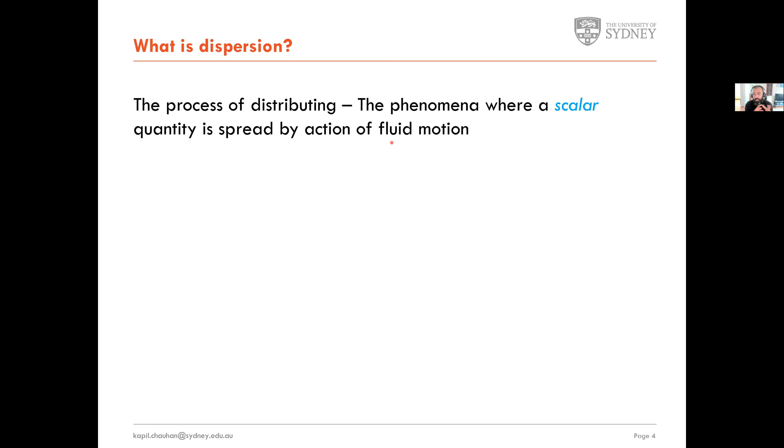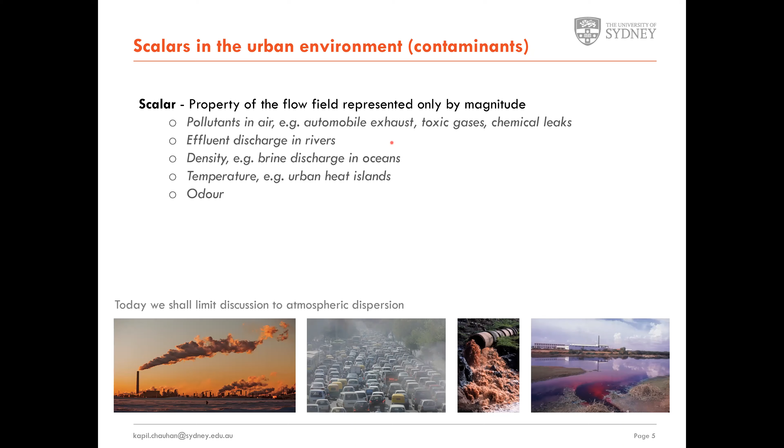Scalars in the urban environment can be categorized in different groups. These could be pollutants in air, which usually come from factories and automobile exhaust. They can be toxic. They can be accidental chemical leaks. There could be scalars or contaminants dispersed in water, in rivers or brine discharge in the ocean. Scalar is also temperature, so you can have temperature mixing with the environment because of urban heat islands. And then there is also odor, which is smell.

Scalars can be passive. When they are passive, they follow the flow and they cannot influence the flow field. So in this example here, what you see is that some smoke is released from these tubes and it just follows the flow and it gives you an instantaneous idea of where the flow is going.

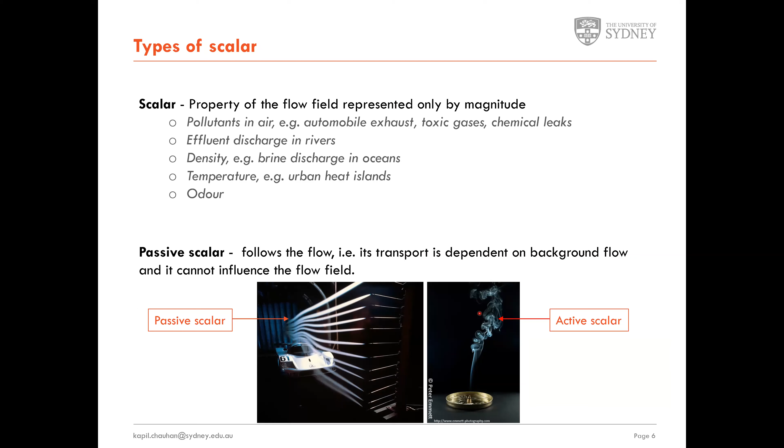And it can be active. So this is something that you would see in a volcanic eruption, where the smoke is hot and it will rise up by itself. So there is no external forcing needed for it to go along its path.

An important aspect of scalar dispersion is also the geometry of release. So there is a point source, where the location from which the scalar is emerging is quite small or point-like compared to the domain in which it is dispersing. Okay. It can be a line source. So think of a traffic jam and all these cars are exhausting some toxic chemicals, and then it's coming out looking like a line source.

And then there are area sources. So bushfires, or smoke coming from bushfires, are a large area source. Open landfills, they release odor and they are also an area source.

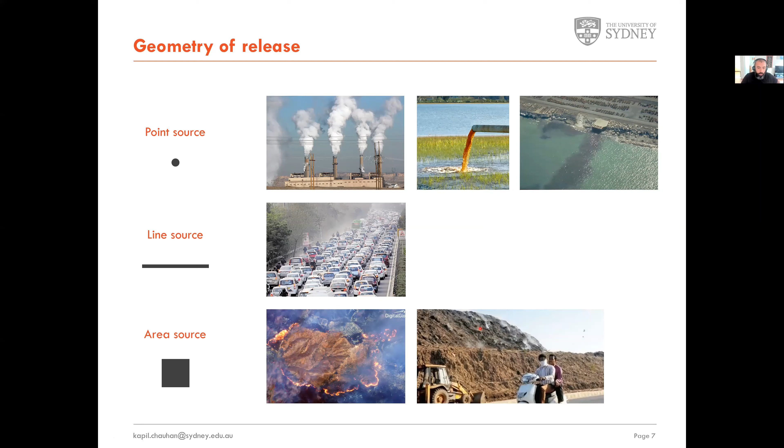Other complexities could be when these scalars or these contaminants are chemically reactive. When that happens, they induce a highly non-uniform source. Okay, so it's like a volume source and it's not uniform. So sometimes you have a very strong chemical reaction happening in some part of the plume or the flow, whereas in other parts it might not be that strong. You also need a priori knowledge of the chemical composition, which is changing all the time. And there is a significant variation in density.

You can have particulate matter, which is quite commonly known as soot, or you can think of the terms PM 2.5 or PM 10, where PM 2.5 is matter 2.5 microns in diameter or smaller, and PM 10 is 10 microns in diameter or smaller. And because they are solid particles, they have higher density than surrounding air, and they don't strictly follow the flow because they have a settling velocity.

And it depends on how strong the forcing wind is. If the wind is strong, then they almost follow the flow, but otherwise they will deposit somewhere else.

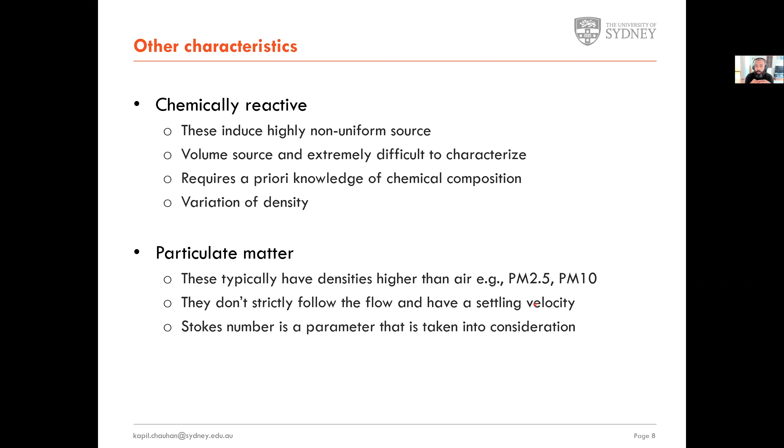Why are we studying dispersion? It's an important problem. We know that because everything that we know about air pollution is not good. There are some interesting numbers to look at. I didn't think of this when I started this research, but more people on our planet live in urban areas than in rural areas. And as of 2021, there are 35 megacities, which means that there are more than 10 million people in each of those.

So a substantial population of our planet is living in congested, crowded environments. And in all these environments, all the activities that we do, like taking transportation and infrastructure, require energy, and we have emissions coming from those activities. These emissions usually lead to air pollution, and they cause a lot of health problems such as asthma, cardiovascular disease, and so on.

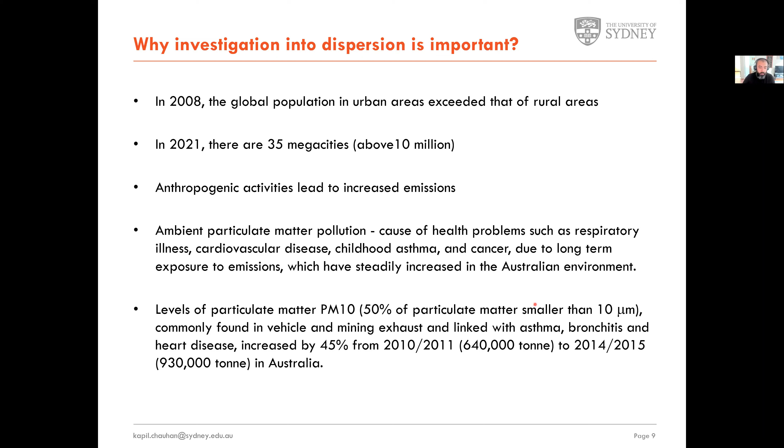Particularly, particulate matter is significantly harmful, which is why there is a significant push to get rid of diesel exhaust and cars which have conventional combustion chambers, which is why electric cars are preferred now. But unless we generate that electricity using a clean source, we are not solving the problem, we are just pushing it somewhere else. Again, there is a health issue associated with air pollution.

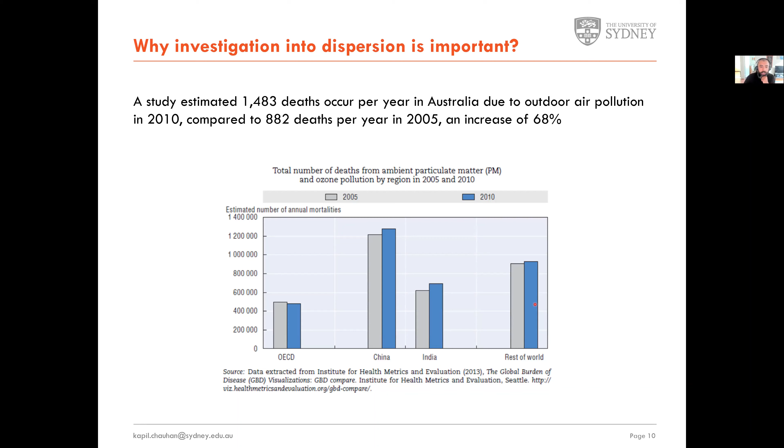So these are the numbers from a study that was done in 2013. I don't have the latest numbers, but the significance is evident here, where the number of deaths occurring due to air pollution itself is more than anything that we have seen. I think these numbers are even worse than COVID. And there is a significant jump in 5 years. So you can imagine that if we keep increasing the urban density, these issues will become more and more severe.

So what do we want from studying urban dispersion? The expectation is that we cannot get rid of emissions, at least not until 2050 when we want to go to net zero. So emissions are part of life. And they could be sustained release from known sources.

So how do we predict what's going to happen to the regions around it and where the smoke is going? There could be also accidental release, and this is temporary. This could happen over a period of hours or a few days or weeks in terms of bushfire, and then we want to predict where is this going and what would be the impact in the surroundings.

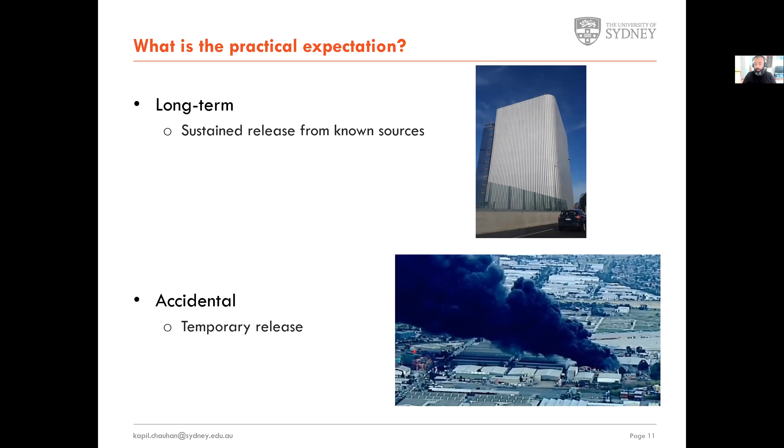Which locations in space are more likely to be at risk? So again, going back to this, if this plume is always going up, then only the regions around it will be affected. But due to the atmospheric turbulence, it is very likely that the smoke is going to come down again, and we'll talk about that a bit later. And then it can create issues for people who are not in the vicinity of the source, but many kilometers away. And this probability of exceedance we need to know for emergency response. So what action needs to be taken?

Exposure time is something that is used for urban planning and policy. So for long-term exposure, if you have, let's say, a sewage treatment plant, and there is some odor coming out of it, and it's going to be there for many, many years, then the development will prefer that there are no residential areas around there, because their quality of life will be affected by that. So you want to predict what would be the impact of a sewage treatment plant in the surrounding neighborhood.

You want to predict what would be the impact of a chimney exhaust out of M4 to the surrounding neighborhood, how long it will be, or how tall it would be. And these things can be understood by looking at exposure times. And this could be intermittent, but they can be modeled.

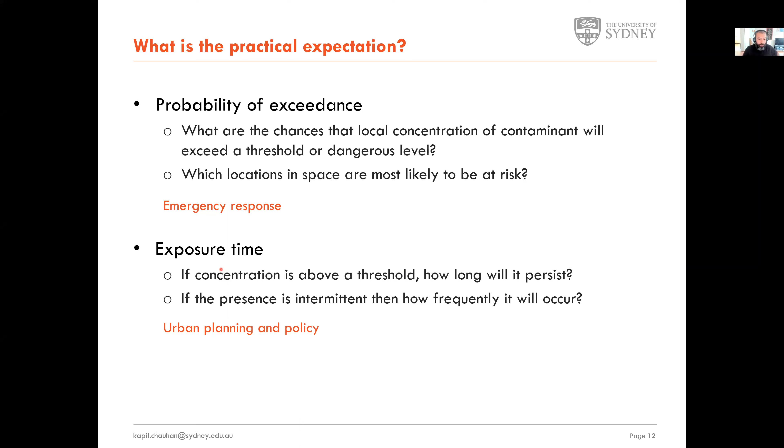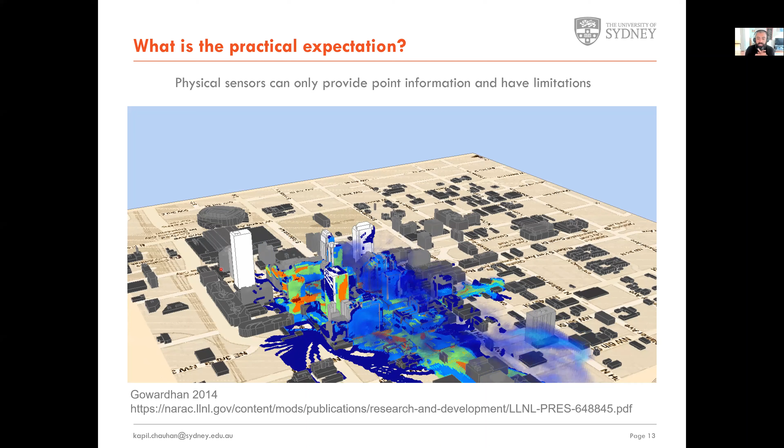So ideally, we would like to have the capability of predicting urban dispersion in a scenario like this, because physical sensors are limited. I cannot have a physical sensor placed at every corner of Sydney CBD. There would be just too many and too much data to keep track of. So what we would like to do is simulation. This is a simulation of an accidental release where something has given up here and then it is moving due to action of wind and it's spreading in the CBD area.

To do this, we want to do simulations using the governing equations. There are two governing equations that we need to keep track of, the flow itself and the concentration. Fluid flow is governed by a set of nonlinear partial differential equations known as the Navier-Stokes equations. I don't have this slide to scare you. I just have this slide for you to appreciate that things get complex very easily. This I show in my course too, and I don't expect students to remember this equation, but they are there. You can't get rid of them.

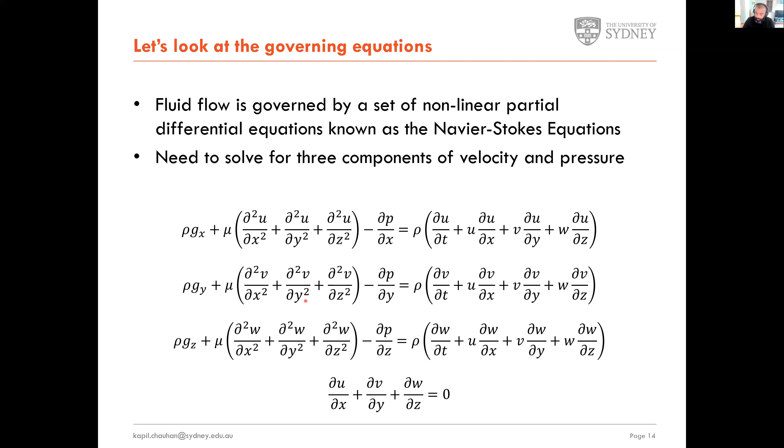So we know that dispersion happens by fluid flow. If you want to know the fluid flow, we need to solve these equations, the three components of velocity and pressure. Easier said than done, because Navier-Stokes equations don't have a solution. There is an institute called Clay Mathematics Institute that has outlined 7 problems, and if you solve one of those, such as the Navier-Stokes equations, you get a $1 million prize. Navier-Stokes equations are still not solved, which is a big problem.

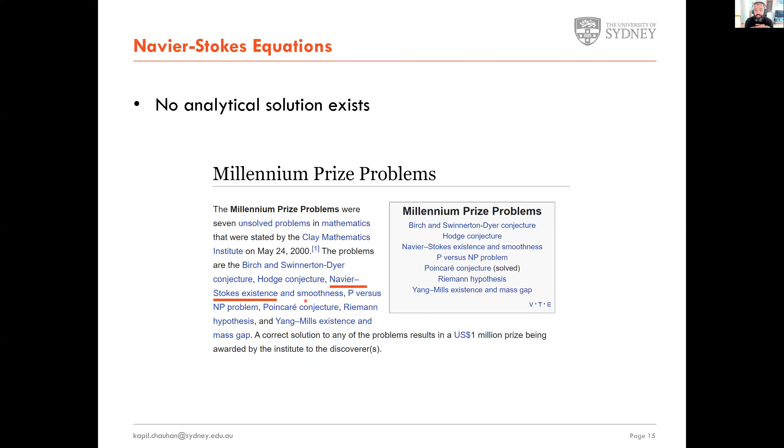These were formulated in, I think, the early 19th century, and it's more than 150 years, and we still don't have an analytical expression for these. So we have a phenomenon which is governed by a flow which has equations that cannot be solved. On top of that, we have the scalar dispersion equation, where there is a source term, a diffusion term, and an advection term, and this is the time variation, which is often ignored for steady state. But advection is the term governing how a scalar quantity phi will move in the flow, and this requires knowledge of velocity.

If we don't have knowledge of velocity, if we can't solve the Navier-Stokes equation, we can't solve the dispersion equation. So we are limited by those factors. Ideally, we would like a solution which says what is the concentration at a given location, given wind speeds, a given pressure, temperature, and time. But that is not always possible.

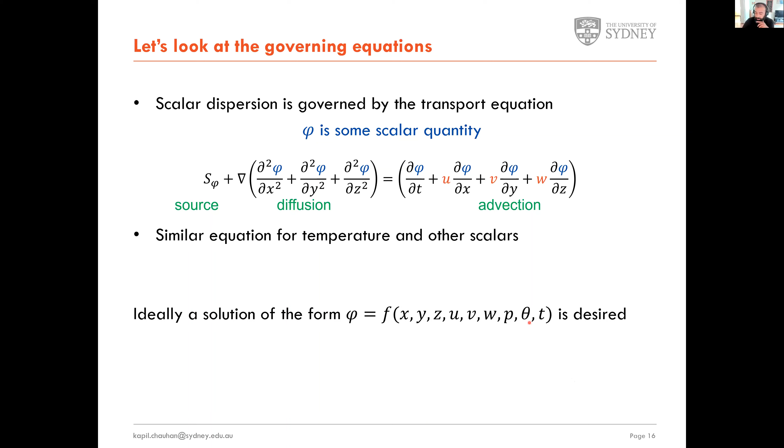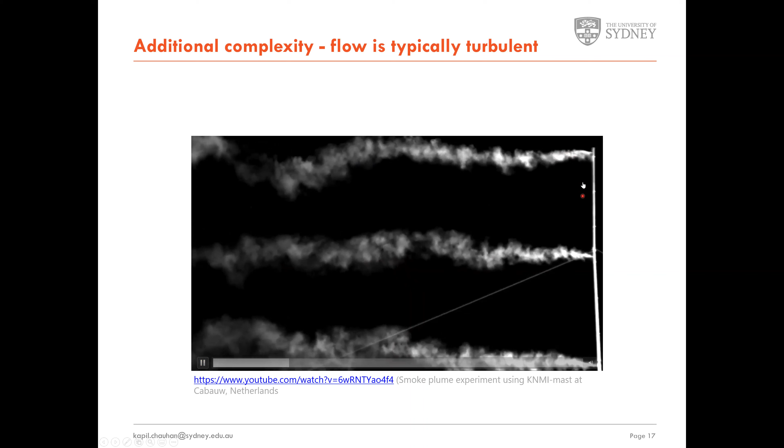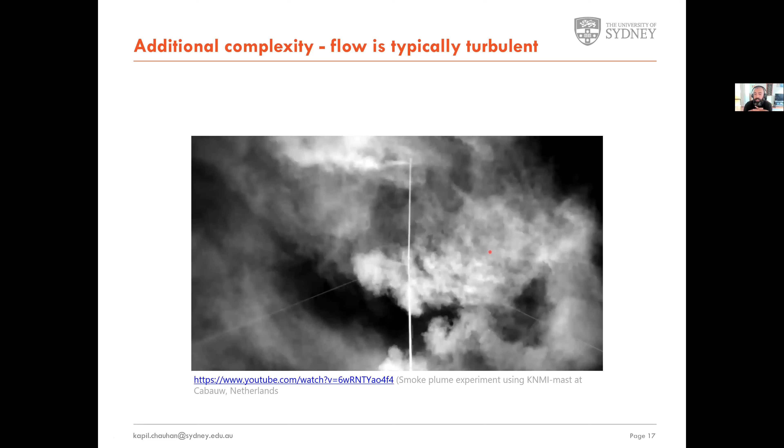These equations we cannot solve, and there is an additional complexity where flow is also turbulent. Here is an example of flow visualization where some smoke is released in the atmosphere. These are field experiments, and you can see that it's not moving smoothly. There is some fluctuating behavior, and this fluctuating behavior keeps changing. It's not that it is just moving randomly. It keeps changing direction. It's very erratic. This is a turbulent flow. Turbulent flow on top of a Navier-Stokes equation that cannot be solved creates more complexity.

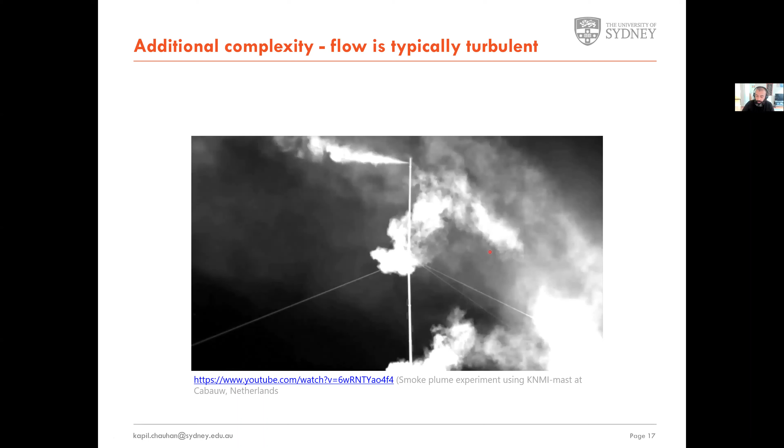So we are left with solving these equations by numerical methods. Something like Newton-Raphson or RK4, we can use and do a numerical simulation. Numerical simulations are challenging because the flow is turbulent, and it requires us to resolve things at many different scales. If you look at the plume here, at the source it has some diameter which could be a few hundred meters. Once it goes up in the atmosphere, its diameter could be of the order of kilometers. And then it has these big bulges, then it has small scale features.

To resolve this, we need a fine mesh to do the computations. If I take a grid which is only this big, I can only know features which are this big. I cannot know the details residing in this box. If I take a smaller grid, the details I get are bounded by the size of the box. If I want the finest features, I have to make my meshing even smaller. This is similar to having more pixels in an image: a high resolution photograph shows more details. Same goes with numerical simulations of fluid flow. More points in your domain give better details of the flow, but that comes with the cost of computation.

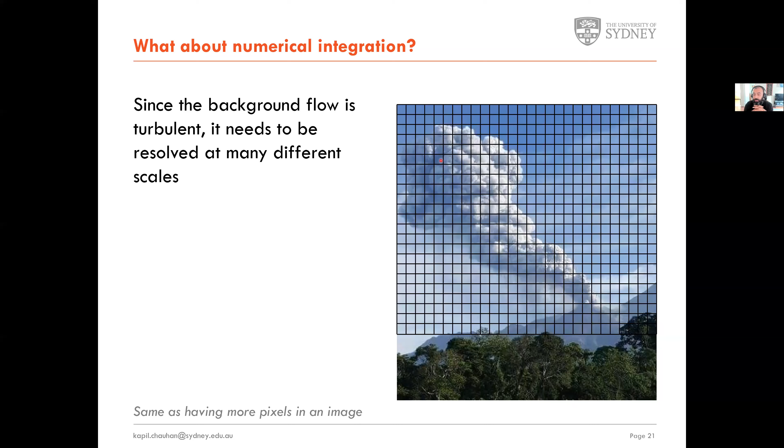So in this example, let's think of a box starting from the source, going all the way up to the Sydney CBD, about 100 kilometers long. We will take the box to be 20 kilometers wide, and in the vertical direction 1 kilometer. Sorry, this should be 1 kilometer, not 1 meter. So we are hoping to simulate something which is 100 kilometers by 20 kilometers by 1 kilometer, and the desired resolution is 10 meters. At every 10 meters we would have 1 point, resulting in 10,000 by 2,000 by 100 grid points. We have to represent these points for velocities, pressure, their derivatives. So the memory requirement just to represent the primary variables at one time step is 600 GB. This is an estimate.

If we are going to do an unsteady simulation where we want to predict dispersion at many time steps, then the memory requirement is even higher. And calculations on these large matrices and taking derivatives is quite slow. So we have to be smart about the simulations. In practice, what we do is something called a Reynolds decomposition. The equations are not of importance here.

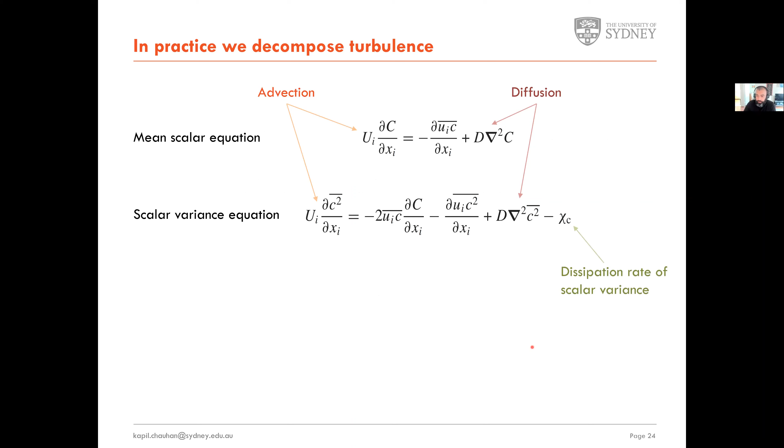And when we do that, our equation for the scalar, now using C as concentration, will have the advection term, but now for the mean quantity itself. And there is no time dependent term here. Then it would have diffusion, which is based on the flow properties. Diffusion of a scalar depends on the scalar itself. And then we have these terms which are due to turbulent transport. These are the terms responsible for mixing the scalar in a random and erratic manner.

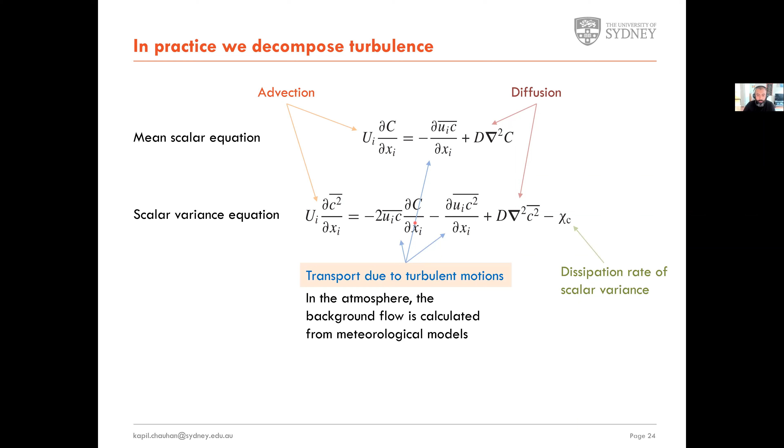And these terms are something that we approximate. So we don't calculate them, but we use empirical relations or functional forms to approximate them. These are not known beforehand, so we have to estimate them based on measurements or some kind of theoretical arguments. But because they are approximations, they also induce some error.

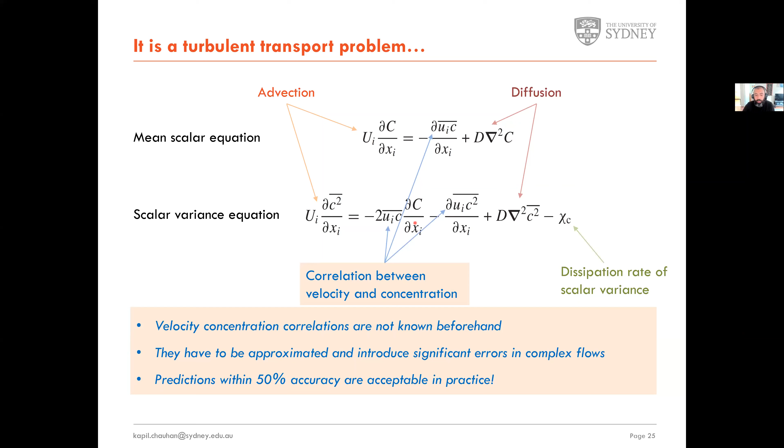And in practice, if we get our concentration prediction within 50% right, we are doing a good job. That's being changed because we have faster computers and people are doing very large scale simulations. But even now, for regulatory models, anything under 50% is acceptable.

So one of the ways to simplify this equation, where we can calculate this left-hand side, we can calculate the diffusion term, but we cannot calculate this, is to replace this flux term by a gradient diffusion model by estimating an eddy diffusivity. And when we do that, we can then solve this equation and we can get an analytical expression for the concentration.

And the analytical expression for concentration gives you a profile of the concentration in XYZ such that in X, it is moving with the wind direction, and in Y and Z, it is spreading according to a Gaussian profile. So this is called a Gaussian plume. The trick here is to prescribe these half widths. So it will spread in the Y direction or the lateral direction. It will spread in the vertical direction.

And we have to prescribe those growth rates based on experience, experimental evidence, and that will change depending on the local conditions. When we do that, we can very well estimate what the concentration would be. There are empirical models which will also give the probabilities.

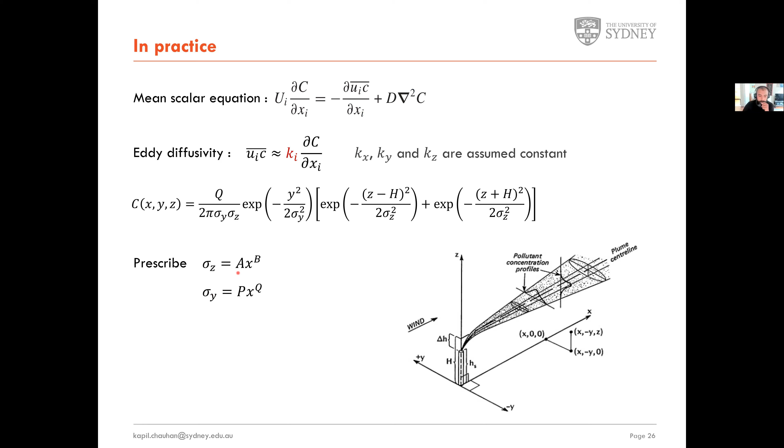There are many local models available worldwide. Now these are local models because these quantities that we prescribe will change depending on where you are. So if you prescribe this in a flat area, it won't be the same in semi-residential areas. So different authorities or different local regions will say, use this model because it works better for our cases.

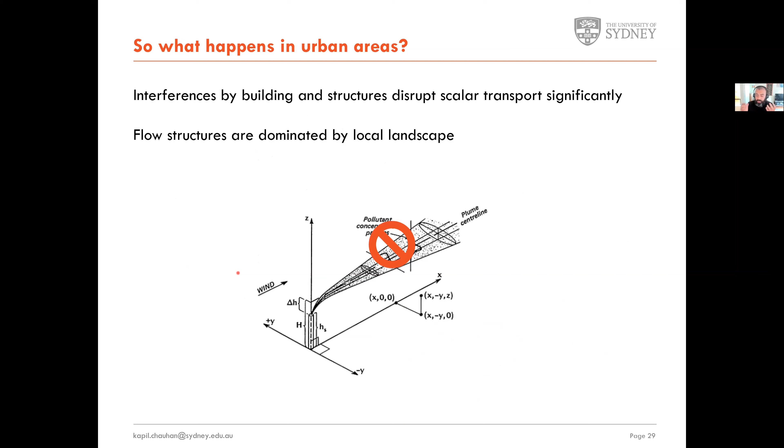Urban flow is characterized by a canopy layer where the flow is dominated by the presence of buildings and trees and other landscape structures. And in this region, you will get a lot of backflow and recirculation, a lot of regions where there would be stagnation of flow and the concentration can get trapped.

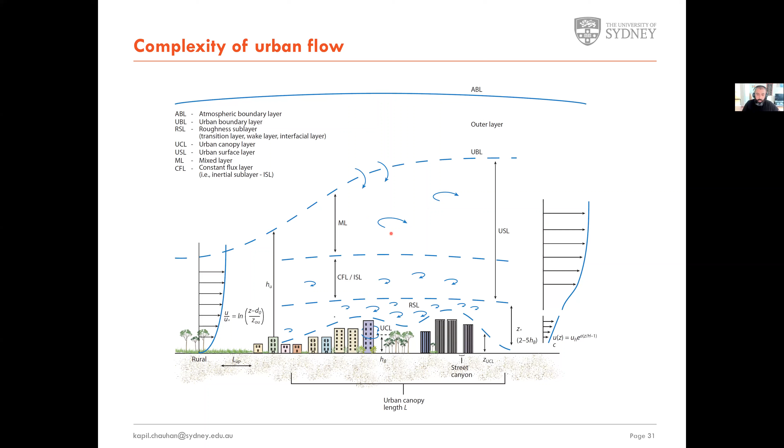Urban flows are complex, not just because of the presence of the urban environment, but also because of the surface. Because in the urban environment, you will get some distribution of velocity going from very high at the top and low at the bottom. But in an area like Sydney or Melbourne, which are coastal areas, you will have flow which will suddenly change from a very dense roughness area to a smooth or relatively smooth region over an ocean.

And in that case, the profile or the change of the velocity from the bottom to the top changes quite significantly. So the incoming flow will also change. So if you have a plume emerging from this region, it will spread differently under this profile compared to a plume emerging from this region, and it will spread differently in this profile.

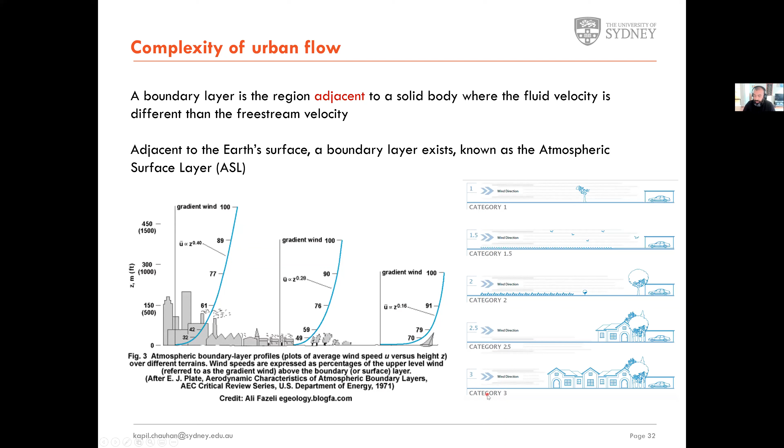So when you have mixed surface characteristics, that will also lead to complex considerations. So in Australia, we have terrain categories to categorize this. Usually anything in the urban region would be in terrain category 3, which means that there will be a strong presence of turbulence in the flow.

At the same time, in the urban region, you also have effects coming from stability. So stability is something where you have a daily cycle of day and night, where the surface gets heated during the day and it cools during the night. So the temperature of the atmosphere going from the bottom to top will be different depending on the time of the day.

So when you have an unstable layer, the surface at the bottom is quite warm, whereas the temperature decreases and it goes cooler and cooler further in the atmosphere. This is called an unstable layer because temperature at the bottom is higher, so the density is lower, and because of buoyancy, the flow will automatically want to go up. So it's naturally unstable. And in those cases, if there is a plume, then it will meander very strongly.

An opposite case would be a stable case where the temperature at the bottom is low, density is high, so it will try to remain in that configuration, and a plume will just not mix thoroughly, and it will just keep moving along the flow. And then there would be cases where you would have inversions. So there is a stable behavior, then there is an unstable behavior, and depending on what time of the day it is, the spread can be different. So we have to account for different flows, different geometries, and different temperature conditions.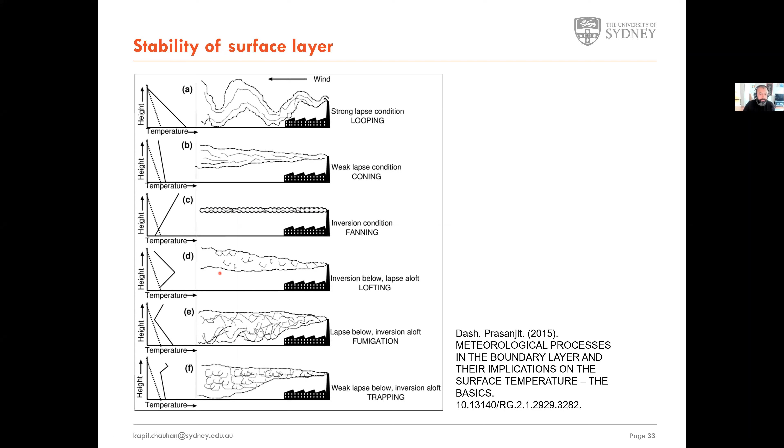And finally, in the urban region, you have something called urban heat islands. And these heat islands have been extensively studied in the past few decades because of the secondary flows that they induce. So what happens in urban heat islands is that you will have regions where there is lack of vegetation and the coverage is primarily asphalt or concrete. And these surfaces absorb a lot of heat during the day, and they don't reflect anything back. This heat is stored during the day and then emitted back at night.

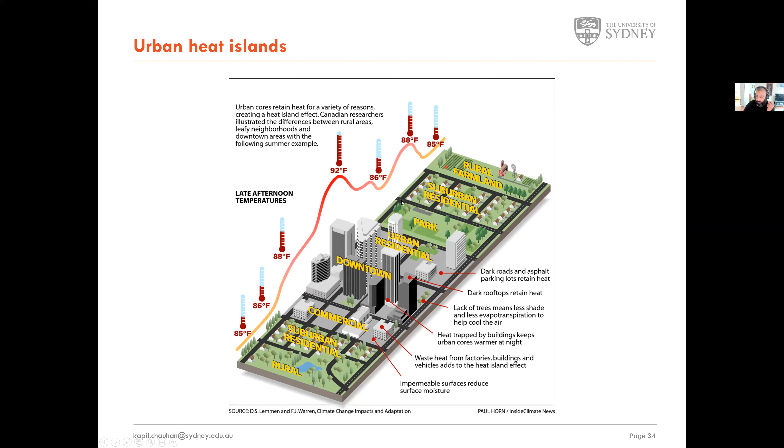And then you can say, I want to resolve the concentration at every 10 meters vertically, but every 500 meters in the horizontal and lateral, depending on the details you want. Once you import that, you then solve an atmospheric or weather forecasting model, which will give you the flow. So this is a model which solves the Navier-Stokes equation, and it will give you what is the velocity

in that box. Once you have the velocity, then you input that velocity to the transport equation for the concentration and use something called Lagrangian tracking at each time step to see where the concentration is moving. And then you will get the full picture where you have the flow and the concentration.

The process requires many steps, and what we want to ideally do is do this in real time. So if there is an accidental release, we want to do this even faster than real time. So if the concentration is going to go from one region to another in, let's say, 30 minutes, we should be able to predict where it's going in less than 30 minutes so that we can do a better response.

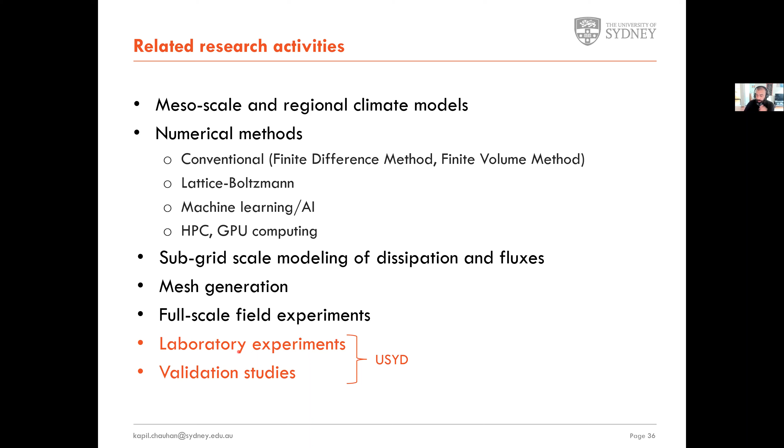So I think I have about 5-10 minutes. So I will quickly go through what we do in the School of Civil Engineering. So we have a boundary layer wind tunnel, which has a very large test section, and it's an amazing facility to do many different studies, not just dispersion. We do wind engineering studies, we do structures in there. And these are some of the characteristics.

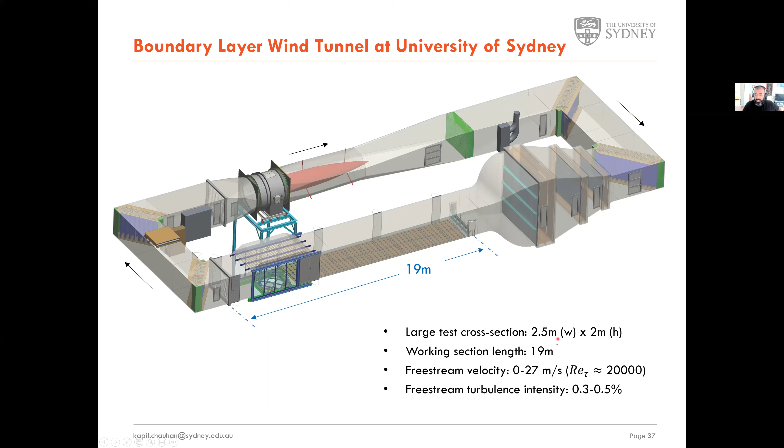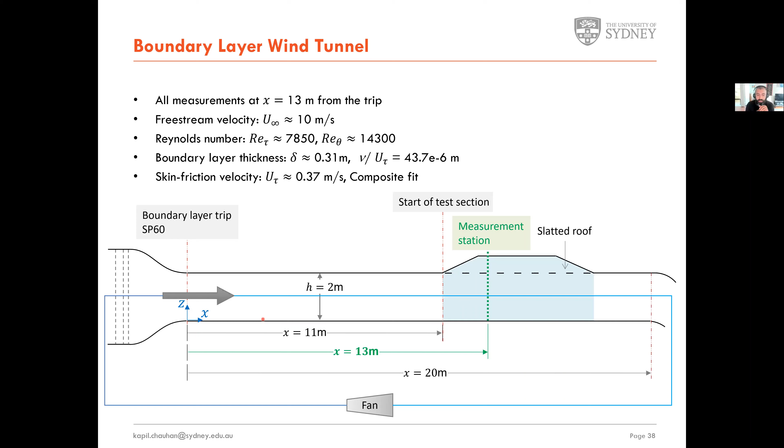It has a big cross section, so we can put large models in there too. And there is a test section where we do all our measurements. And in this region, we can put roughness to create a boundary layer profile. So those profiles that I was showing, which were for different categories, you can generate in our tunnel.

I hope this doesn't crash, because it did earlier. So let me go to the next one.

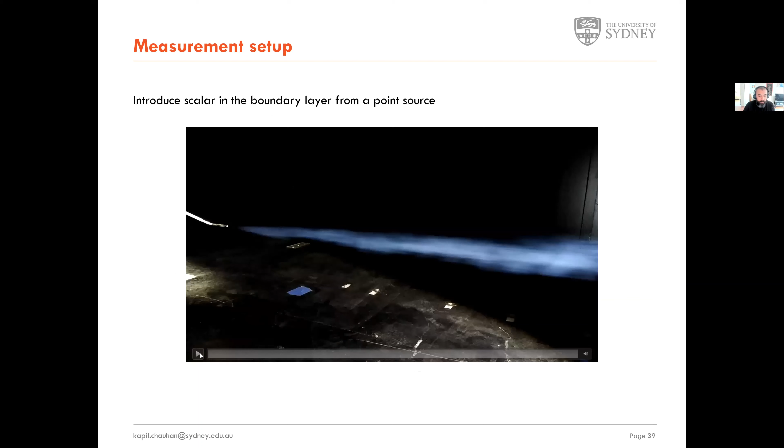So in this wind tunnel, we release smoke. So this is just a visualization. And this is a point source. And what you see is that, I think my computer will crash if I keep it running, but what you will see is that there is a meandering behavior. And although we are releasing smoke continuously, it breaks up very quickly, and then it starts coming in patches.

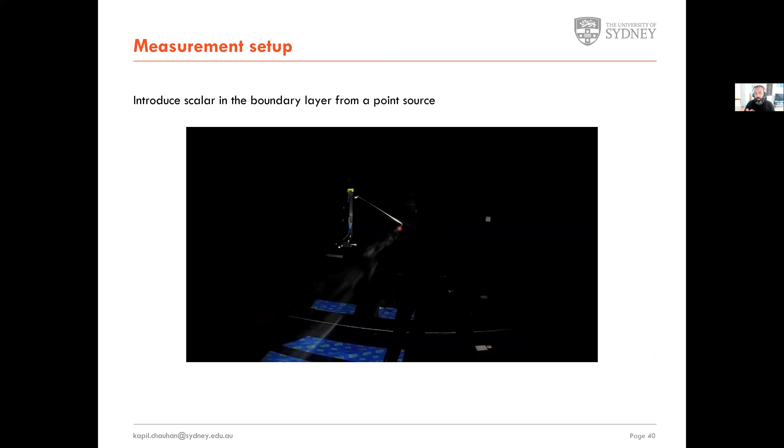So what's happening is that this plume is interacting with the background turbulence. There's turbulence in the flow, and that is the interaction that is governing where it's going. So what we want to do is look at the influence of turbulence in spreading these things.

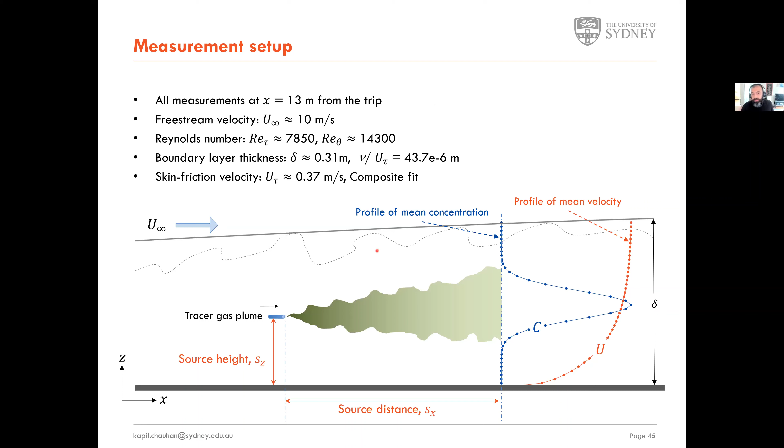So in our wind tunnel, what we end up doing is we release the tracer gas at some height and measure it at some distance downstream, and we measure both concentration and velocity. Concentration is in blue and velocity is in red, and we get a Gaussian behavior, which is good. But when we put building models, we don't get a Gaussian behavior because roughness interacts with it. And we do this at many different locations, and we repeat the experiments to cover a wide range of configurations.

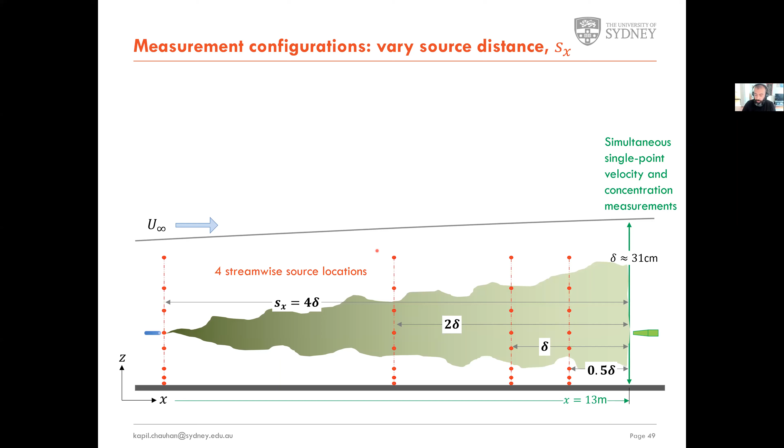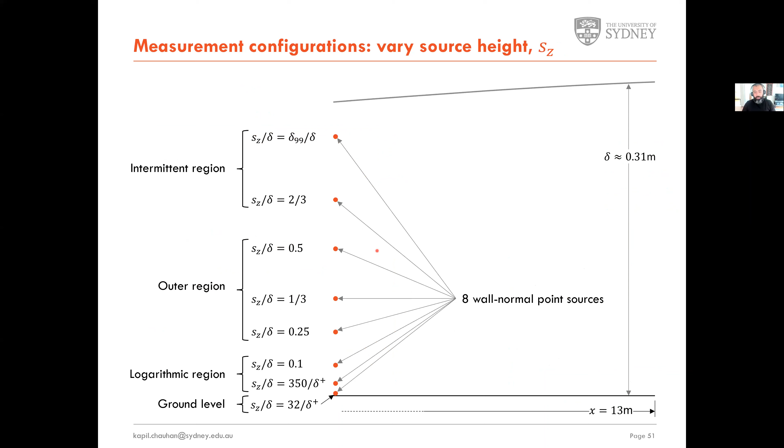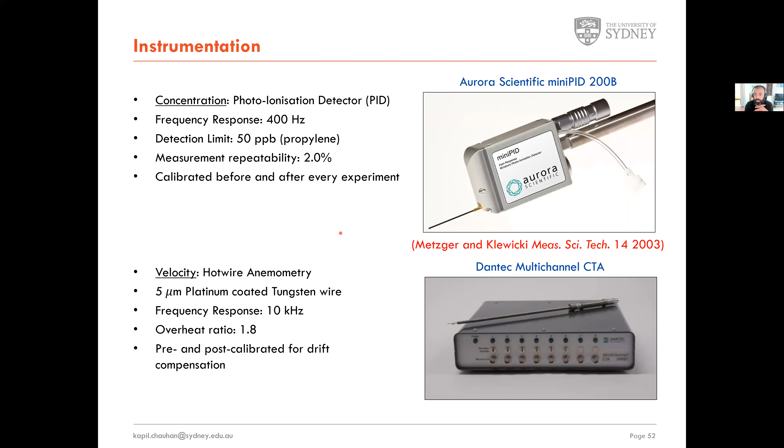We did these experiments over many years, where we released at 8 different wall-normal positions to cover different turbulence levels. And there is sophisticated instrumentation required for this, where we have a photoionization detector to measure the concentration, and we have a velocity probe, which is a hot wire.

And in reality, they look like this, and they're quite small. We want to measure concentration, so it is only 1 millimeter in diameter, and this wire here is 5 micrometers. So we get very fine scale measurements in this flow. And that's what the time series looks like. So this is the velocity at a given position, and this is the concentration that is measured.

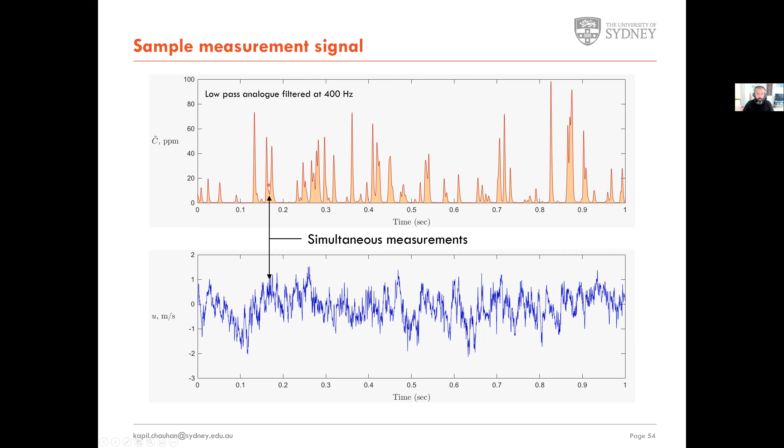And you can see that the concentration is not continuous. It's quite intermittent. And when it's intermittent, it is quiet for a time, there is no concentration, but then it spikes up, there is high concentration, and so on. And based on this, we can create a statistical picture of how the concentration is behaving.

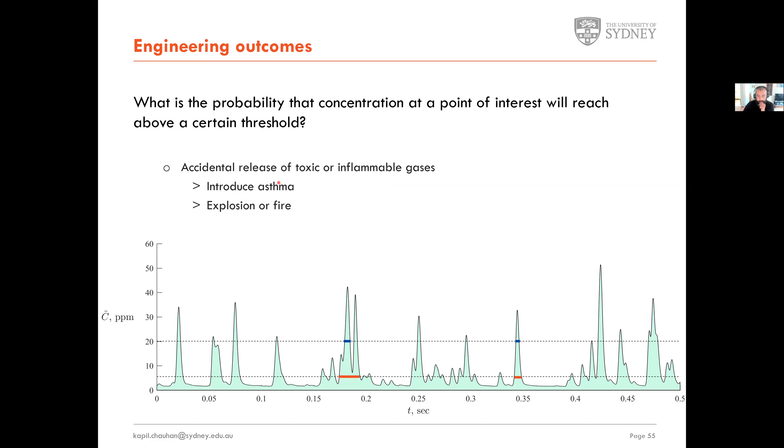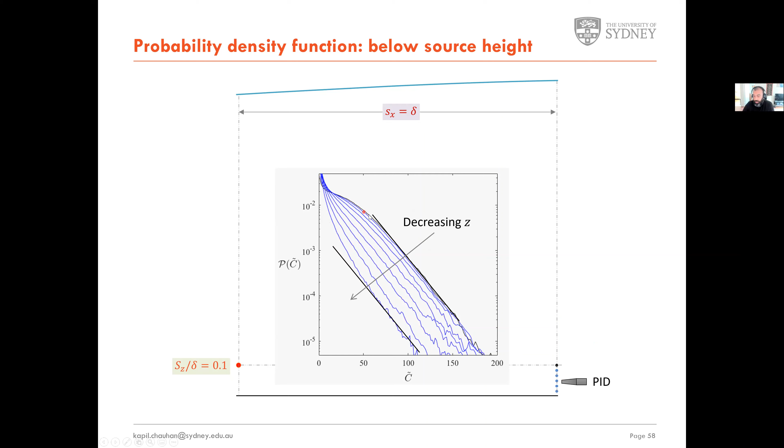We look at the probabilities of the concentration, and we find that the probability distribution function has an exponential behavior. And this exponential behavior is present at many different locations. So if I take the probability distribution function at all these positions, they have the same slope. It doesn't matter where I am. So we can see that there is some similarity.

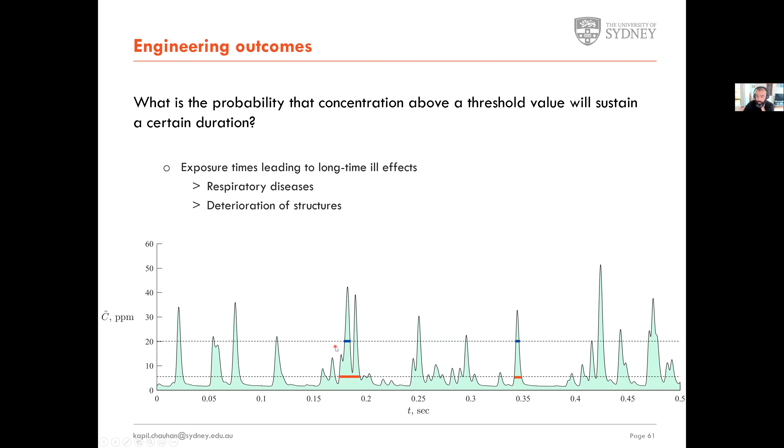So exposure time is where I want to see if the concentration goes beyond this level, how long does it last? And we have found that it has a power law behavior. And in this case, these are lines of constant probability, and they don't change at different levels.

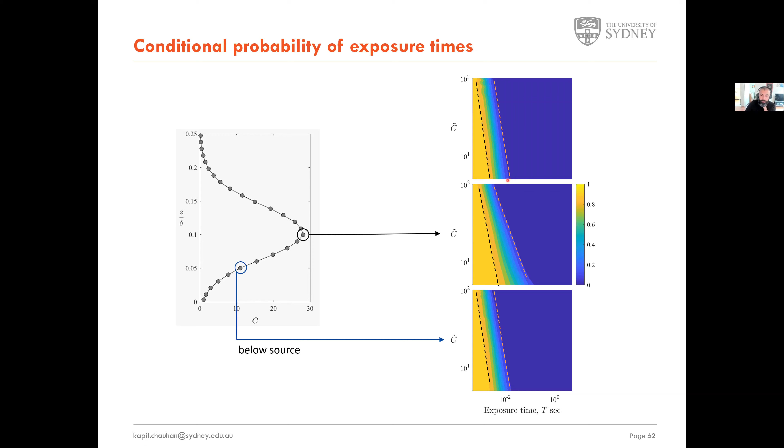So we have done extensive studies to characterize the interaction of concentration and turbulence, and to characterize the statistical behavior. And what we have done, which is novel, is documented the plume width across the whole flow domain, revealed the preferential orientation, validated the exponential distribution, and discovered the log-log distribution for the exposure times. These things are, again, work in progress.

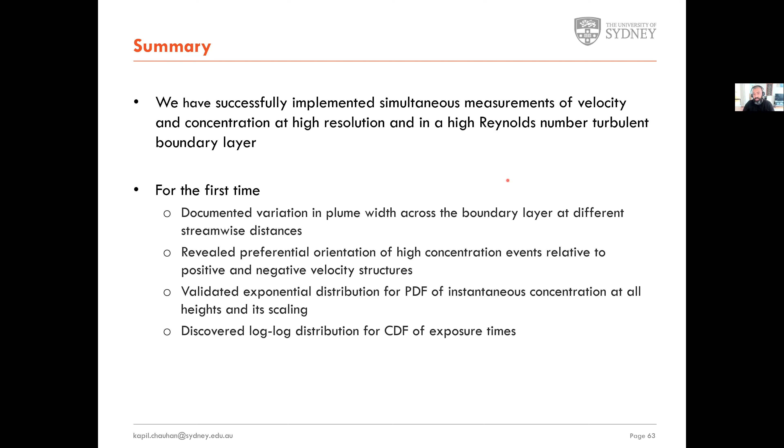I have 2 PhD students who are now looking at complex geometries and effects of buoyancy. These experiments were done in the neutral environment. Now we're looking at a case where the gas that is released has a finite buoyancy such that it will either dip or rise.

So final words from me is that dispersion is and will remain an active area of research because urban dispersion significantly affects the human quality of life, and accurate prediction is something that we want for both urban atmosphere and air quality. I will stop here so that I can take questions.

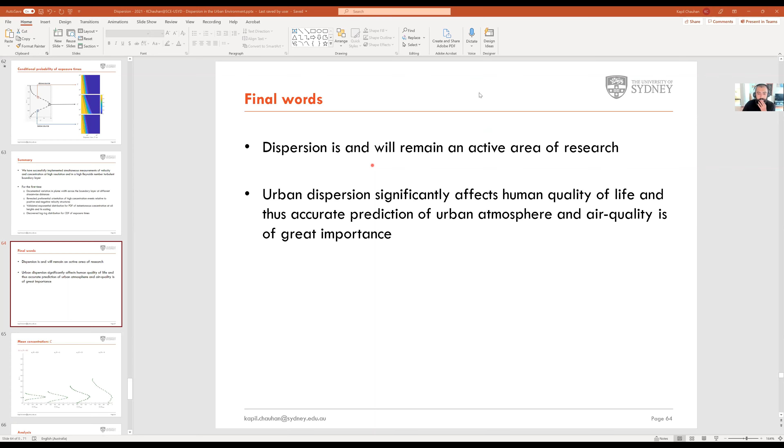But do let me know if you want to know details of something. I'm happy to have a one-on-one discussion with you on some of the things that might have interested you. I found it challenging to put a big picture together, but not missing out on details either. So I hope there are questions. Thanks. Thank you for that great presentation. I might screen share now the Slido questions that students have been putting in. Yeah. Okay. Can you see my screen?

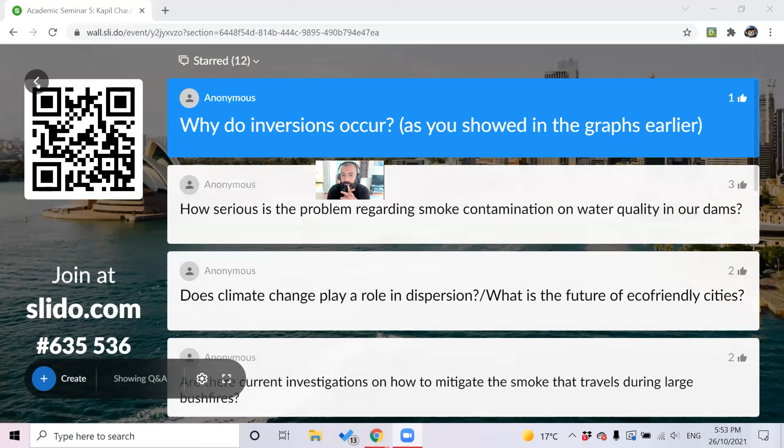All right, so the first question was, why do inversions occur, as you showed in the graphs earlier? Inversions occur for the simple reason that the rate of cooling is not the same. Let's say everything is getting heated during the day, and surfaces like asphalt and concrete have a higher latent heat than the air above.

So at night time, the atmosphere a few hundred meters away from the ground will cool faster than the surface, because the surface is still giving up heat. And this is why you will get an inversion, because the rate of cooling is not the same at all vertical positions in the atmosphere. All right, yeah, that makes sense.

So the next question was, how serious is a problem regarding smoke contamination on water quality in our dams? So it is an issue where you will have air pollution, or something like soot and ash from bushfires. It will get either washed from runoff, or because of rain, it will go into waterways and gets into reservoirs. If there are particles, then they will eventually settle, and they are routinely cleaned by something called dredging.